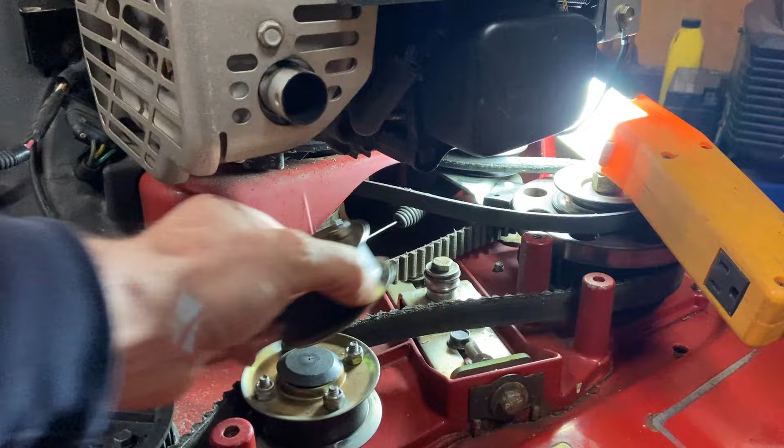Alright, this is usually what happens. The pulley, the bearings end up blowing out, and this will come off and basically get the timing of the belt off, and it's just a mess, especially when it damages the blades. I'll show you that here in a couple minutes.

I replaced this not too long ago, and it didn't actually last long. This might have been one where I actually replaced the bearings. Like I said, I've been replacing these on and off over the last couple of years, so this one didn't last as long as I expected. Once they blow out, the bearings and everything go all over the place.

And before that one, this one here was the one before that one. This one's more my fault - I should have replaced this way before this. You can see where the plastic was just disintegrating, where you could see the threads of the bolts, and then it just got to the point where it busted and blew out everywhere. You can see on this one here where it's starting to really wear real bad.

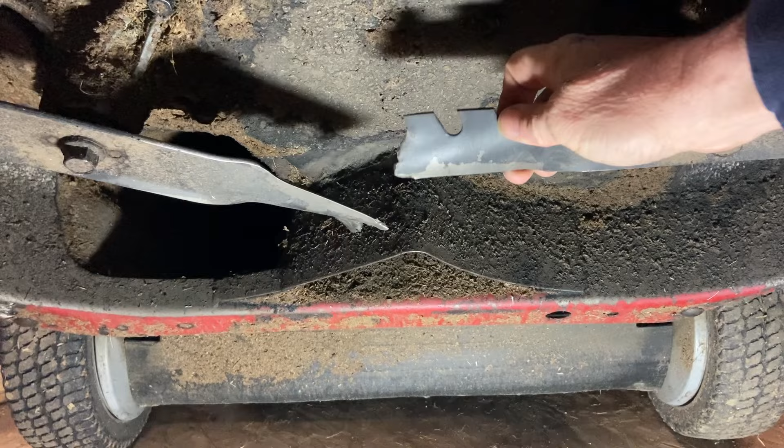Like I mentioned before, sometimes what ends up happening is when the belt jumps because the bearings blow out, or the pulley - the blades will hit, and when they hit, they just tear up the ends of the blade, and basically they're trash. So I'm going to have to take these off and replace them with new ones.

Depending on the price of a new one, at Home Depot they might be around $40 a set now. Online you might be able to get them cheaper, around the $30 mark, but still it's another expense, just because a bearing that's only a few dollars blows out and you end up destroying your blades as well. Not to mention sometimes the belt itself will snap, so it can be a pretty costly repair.

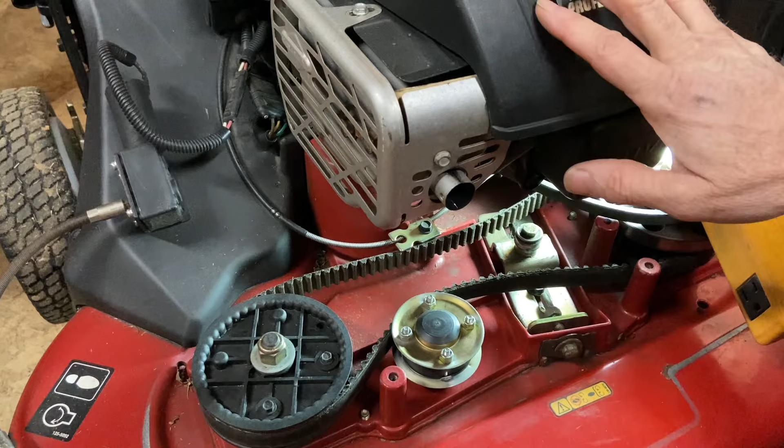This repair is fairly simple. Whenever you work on lawnmowers, always pull the boot off the spark plug, just for safety reasons. Always get in the habit of that, because you never know what might happen. This way you won't have to worry about the engine starting while you're working on it.

So we're going to go through and take off all the hardware that we're going to replace. We don't do it in a specific order, but first we're going to take off the old pulley here. Now these are half-inch bolts on here, so you can quickly get those off.

And disregard those parts - here's the adjustment bracket. There are two half-inch bolts on here as well, one back here and one right here. The bracket slides, so this is your adjustment, and it slides up and down when you tighten or loosen the tension on your belt. So we'll take those out.

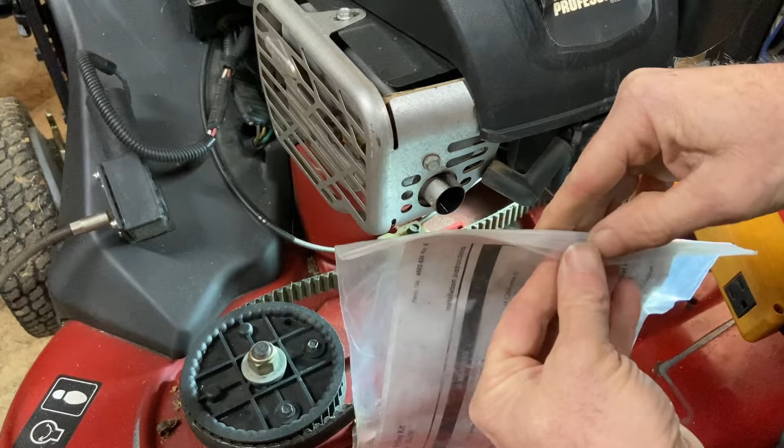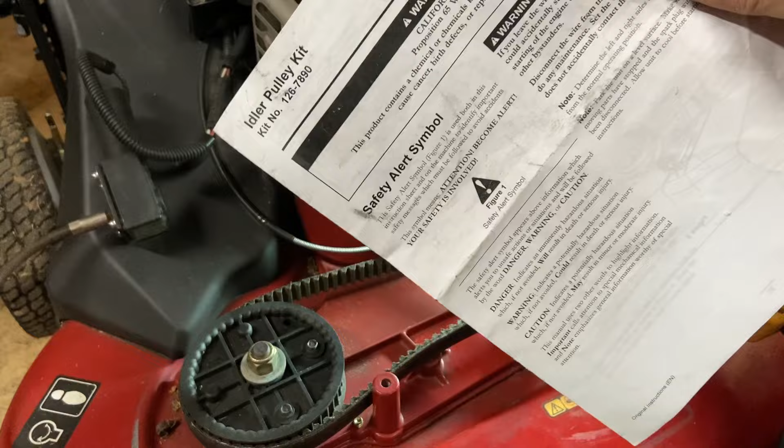And like most of us, you get the directions that come with it, so it's always a good idea to look over the instructions, but a lot of us just wing it. I'll try to refer to the instructions a little bit, so that we do it as far as what the factory recommends.

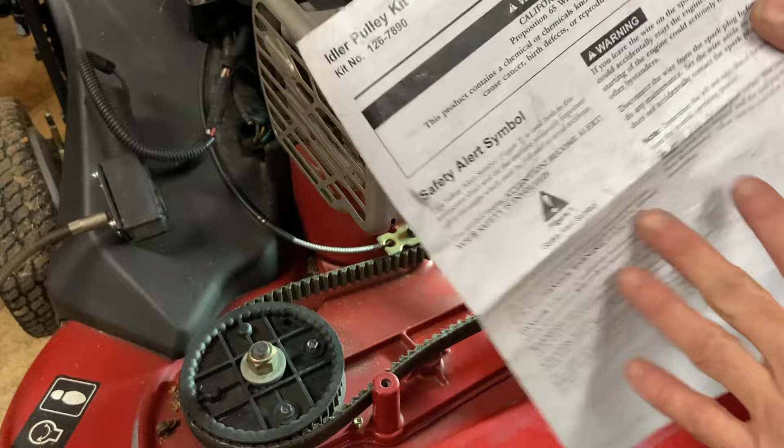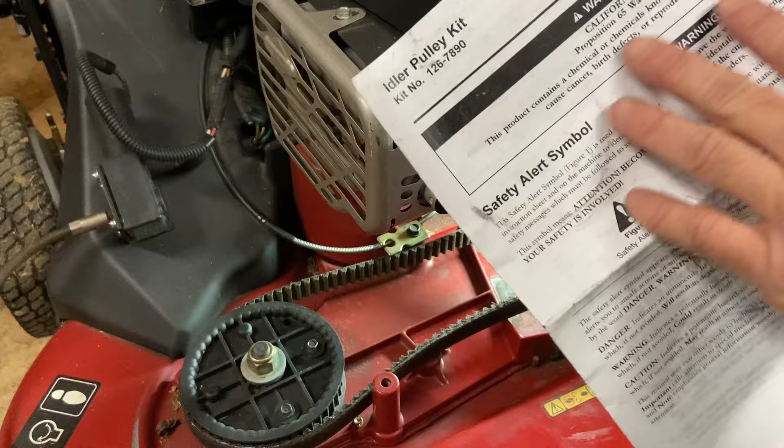As far as this goes, they give you the warnings. If you're in California, be a little hesitant putting this upgrade on, because it does contain some kind of known chemicals that cause cancer and birth defects. So be conscious of that.

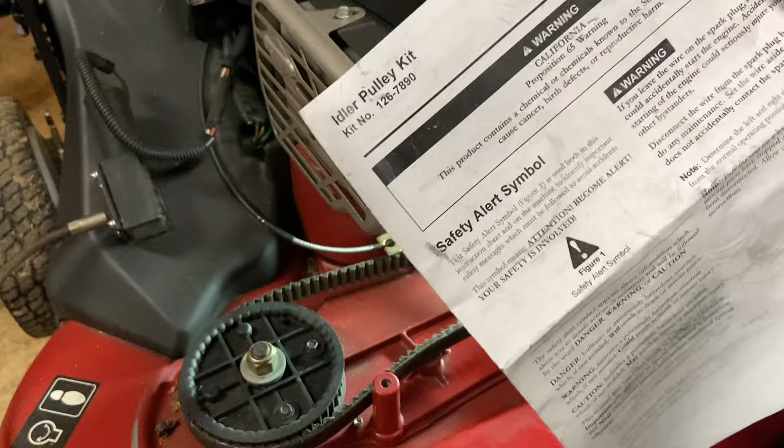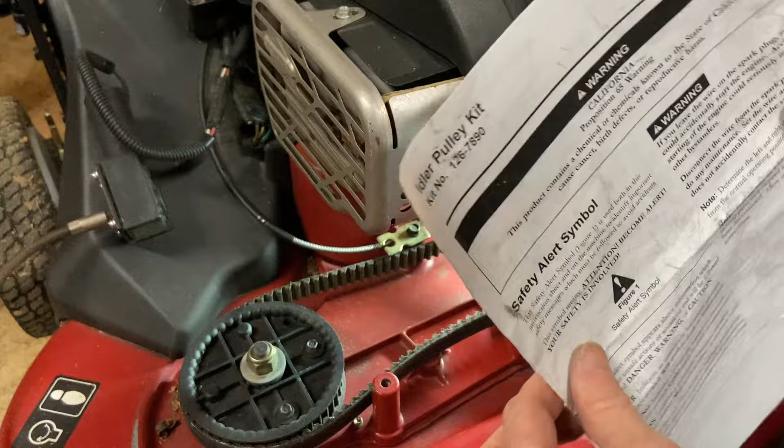And then the other thing, like I say, take the spark plug boot off of there. Always safety first. And then they give you, in the instructions, the parts breakdown and the steps.

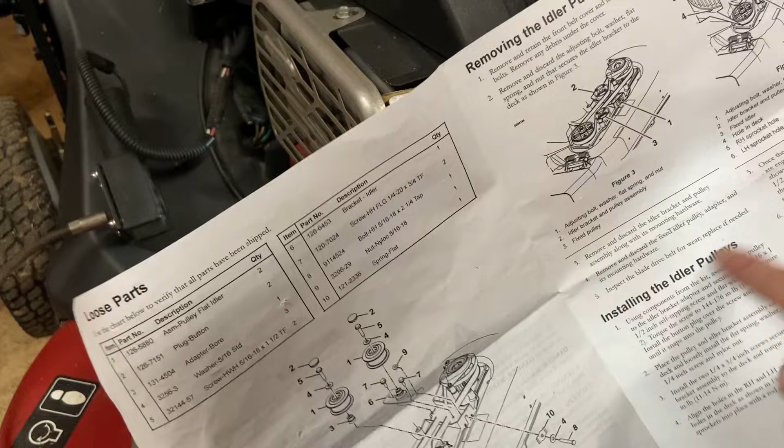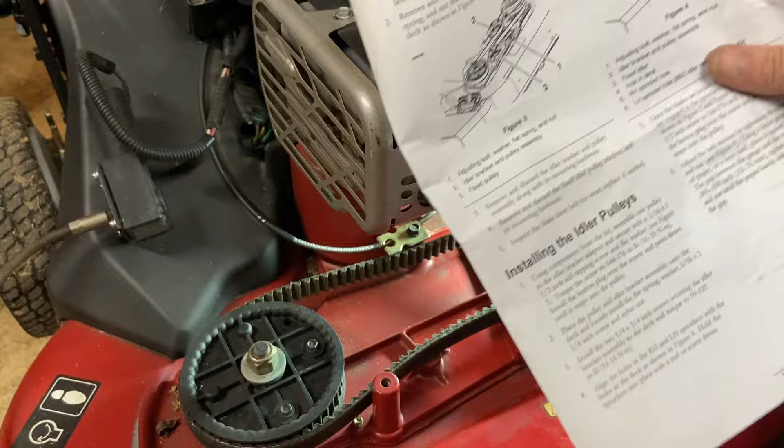We've already done the removal of the hardware, so now we're going to get into installing the new pulleys. It's basically saying here to assemble — well, I'll show you the parts — to assemble the bracket, which is already pretty much done. That's like the first couple of steps, to actually assemble this, but this has already been assembled.

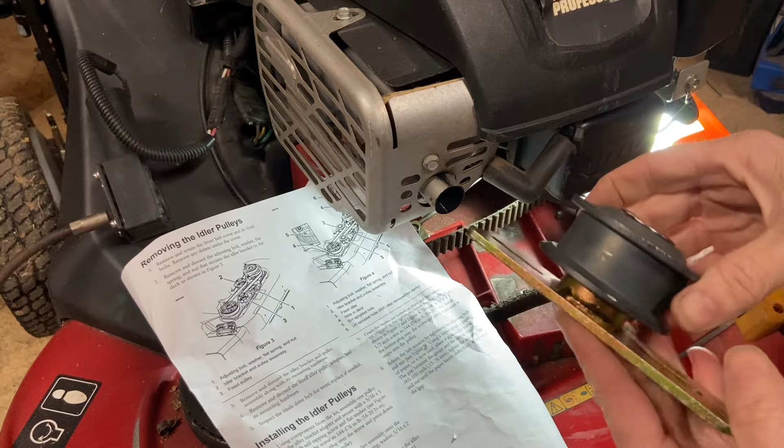And you can see, if I get the other bracket, that there is a difference — slightly — where this one is flat and this one is a little bit different. I don't know if that makes a difference if you're just buying the pulleys, but I'm just going to go ahead and put the new bracket on there.

To put it on, you're just reversing everything. We're going to put this in here like the other bracket was, and in the hardware there should be 2 bolts that you put in that makes the bracket slide. I'm going to use all the new hardware and keep the old hardware for spare. Now I'll go ahead and put these in.

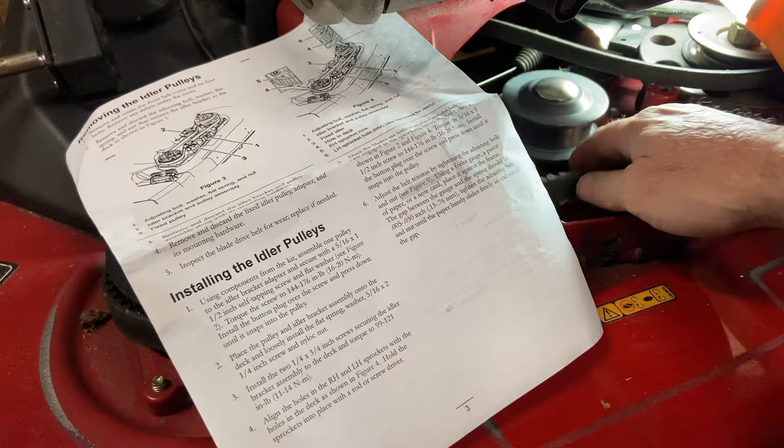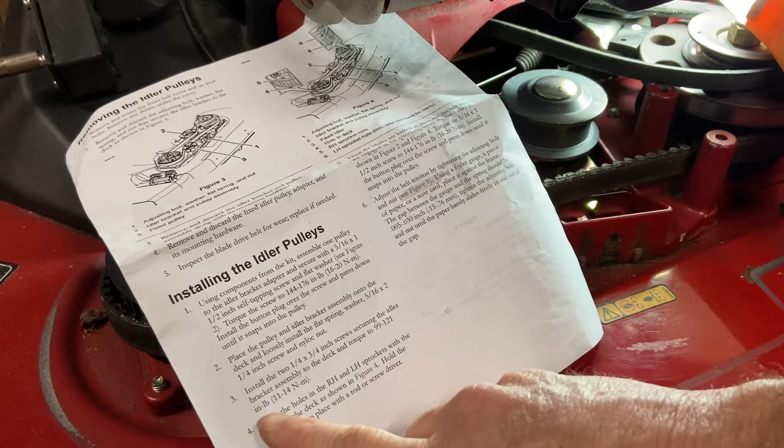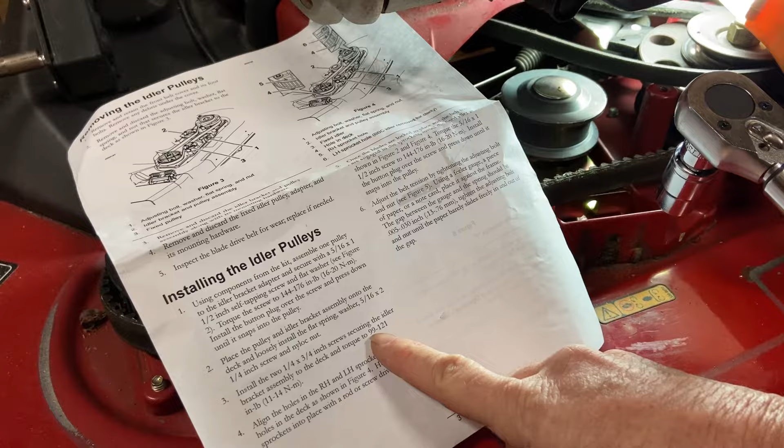All right, the bolts we just put in here actually do have a torque specification, and on the directions it's saying 99 to 121 inch-pounds. Now, I don't have an inch-pound torque wrench, but what you can do is convert it to foot-pounds — you divide it by 12. So you're looking at around 8 to 10 foot-pounds.

So I set that on the torque wrench, and then I can just torque them down with that.

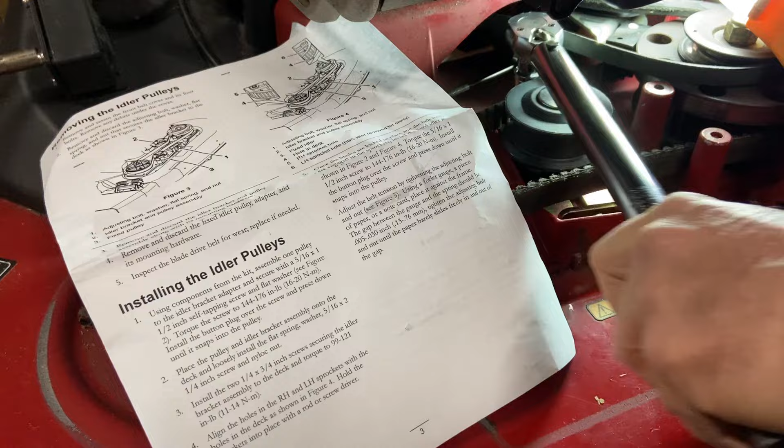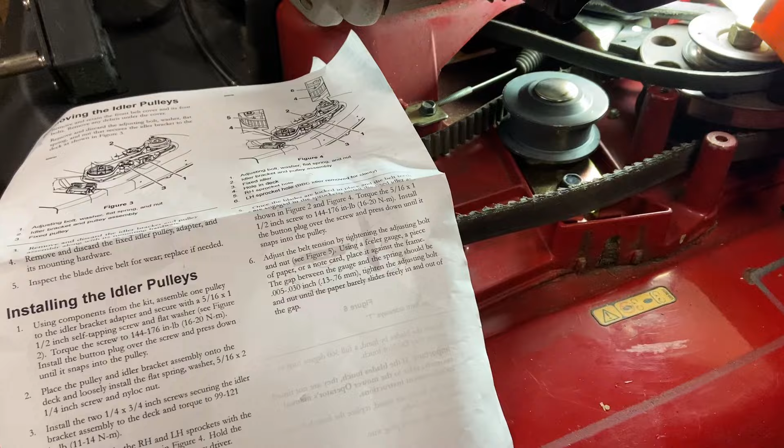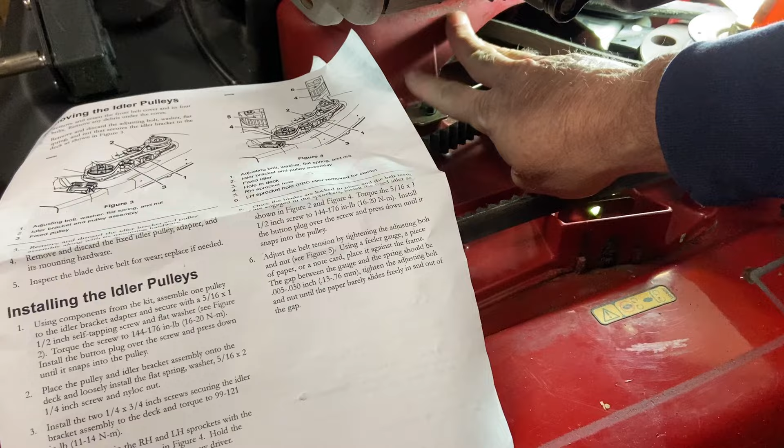You just want to make sure that after you tighten them down, it does slide back and forth, because if you don't get it just right, it might cause it to not slide freely. Double check that, because you don't want to over-tighten these — this is cast steel, the deck's cast steel, and the other frame is cast aluminum. If you over-tighten them, you could strip them out. So don't over-tighten them.

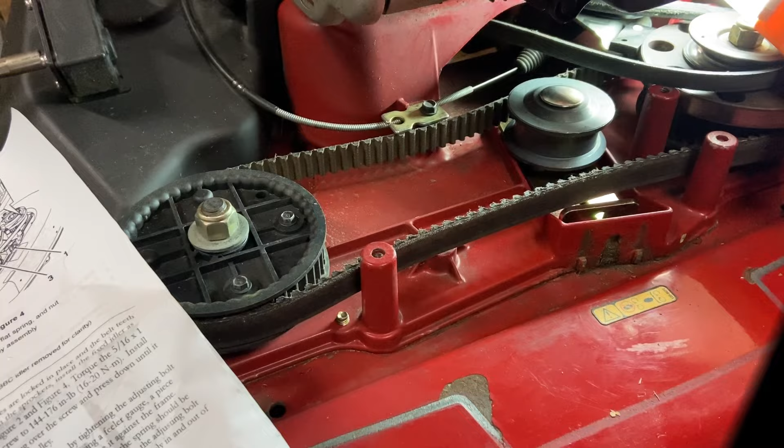All right, next we've got to move the belt here. Yeah, I think it's on this side, and we're going to be putting on the other pulley assembly. It's strange that Toro doesn't specify a replacement bearing — if you wanted to get a new pulley or just the bearing, you have to get the whole pulley. But these are interchangeable because it has the little lock ring there.

Another strange thing is the bearing they use for this heavy duty version is the same bearing they put in the cheap version, so that's kind of strange. The number is actually a 6203 bearing, which is equivalent to 17 millimeter by 40 millimeter by 12 millimeter. So it's nice to order a couple of those from Amazon or wherever you can get your bearings — instead of replacing the whole thing, you could just replace the bearing.

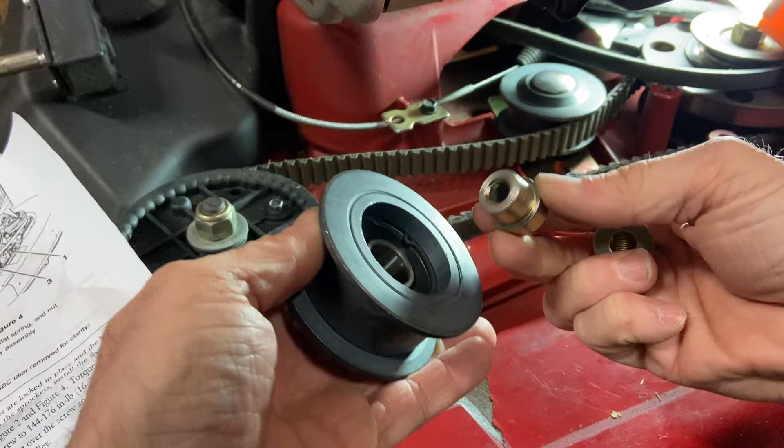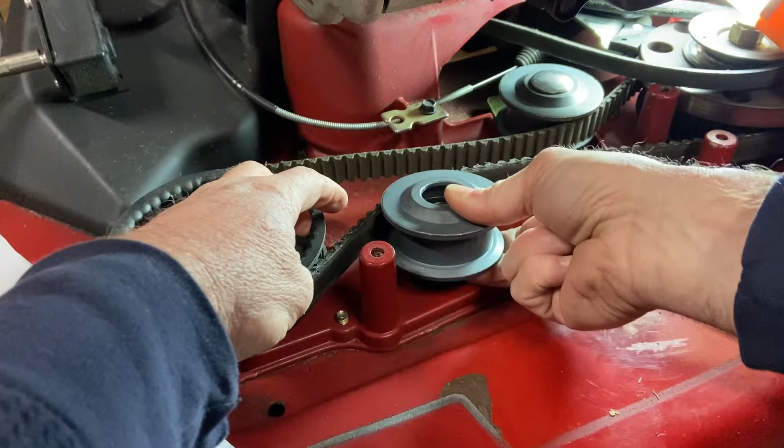Now when you assemble this, it's got some kind of spacer piece on here. You put that on, and I think it goes like this. And then you have a washer, and then the bolt, and screw that in there.

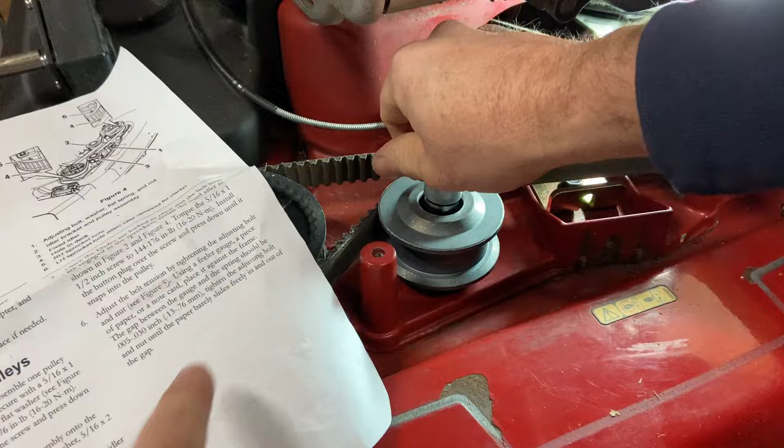This also has a torque setting. By the instructions, it's saying 144 to 176 inch-pounds, which is equivalent to about 12 to 14 foot-pounds. So we'll just go ahead and torque that in.

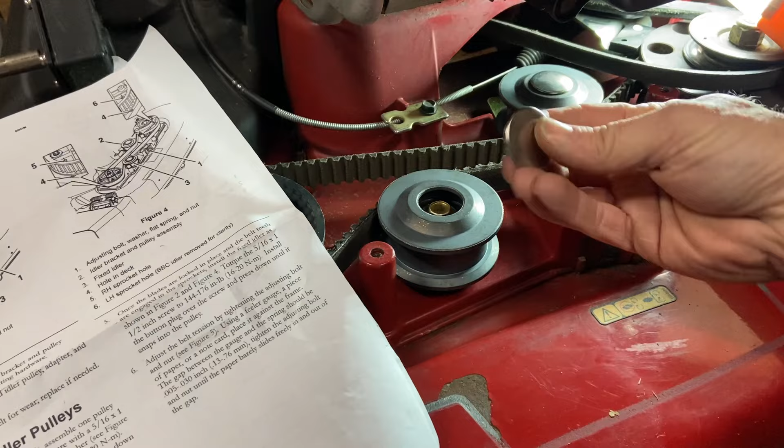Like you say, you don't want to over tighten these things because it's cast steel, so you want it snug but not super tight. And then it's got these nice steel caps instead of those cheap plastic caps. Let's pop those on there—definitely in there a lot tighter than those plastic ones.

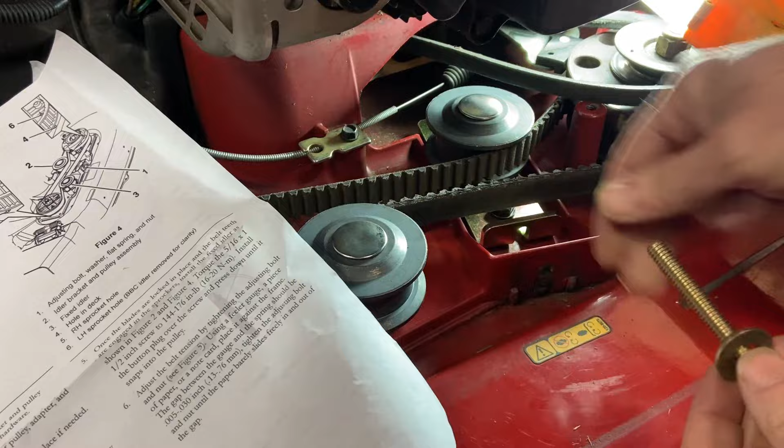All right, next we're going to be installing the adjustment screw. You'll have the bolt here, you put the washer, and then you have this spring washer on there, and then you stick it back through, and then on the other side you have the lock nut.

I have a hard time getting it started. And then start tightening that up.

I've always been wanting to get a cordless ratchet—it'd make this job and these jobs here a lot easier and quicker, but I'll just speed up the video to get through these and tighten this up.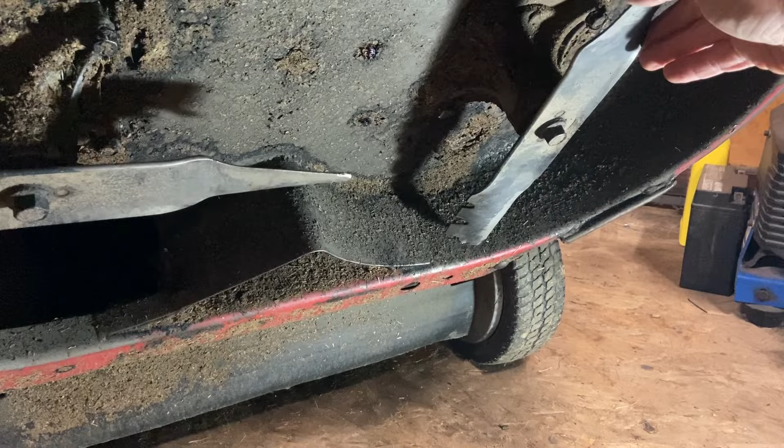All right, that's pretty good. So I'll go ahead and adjust or tighten up the belt.

A lot of us don't know this when we adjust or tighten up the belt. Most of us want to not over tighten it, but have a little bit of play. But there's actually, based on the instructions, a setting that you set it at—it's the distance between here, right here, should be anywhere from 5 to 30 thousandths.

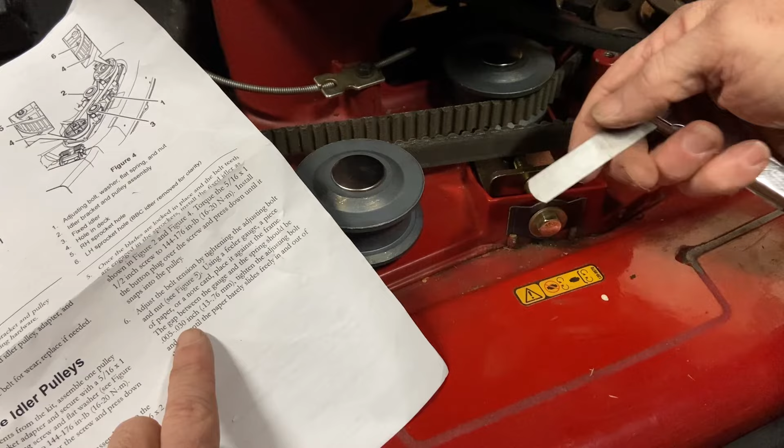So I'm going to set it at 15, right in the middle—15 thousandths. That's about 15 thousandths right there.

That seems, you know, it's not super tight, but it's on the snug side. So I'll just keep it there. That's good to know if you're trying to figure out how to set the tension on your belt.

Because you don't want it too loose to where it could possibly jump a tooth, and you definitely don't want it too tight to where it puts so much stress on the belt that it could break.

Alrighty, I think that's it as far as the installation of the pulley, the updated pulley. So what I'll do is, if there's anything more than this, I'll let you know at the end of this video. But I think this is it.